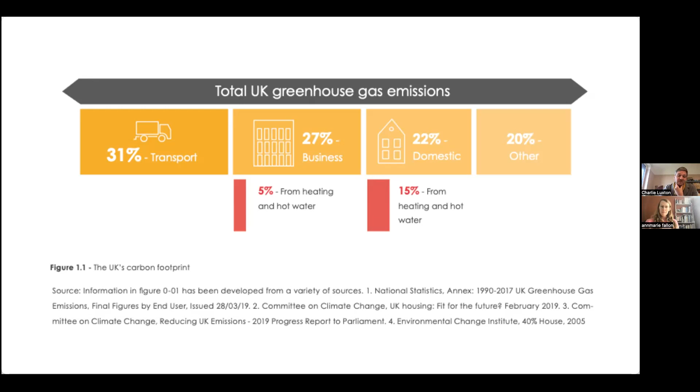Every week we're building something about the size of Paris, which is worrying. The building construction industry is the world's largest consumer of raw materials, and we know we've got to challenge something about that. So we get these wonderful organizations like LETI, which is fantastic, and we have these plans about moving towards zero carbon.

I love this diagram because it's ambitious, and I love it because it feels very friendly. But when you actually start driving into the reality of what you're trying to achieve, these figures are not little blue flags. They are systemic shifts to the entire way in which we not only design, build, and deconstruct, but for new buildings, it's also the way we then heat, and look at all the existing building stock. So it is a systemic change, although this diagram makes it look very pleasant.

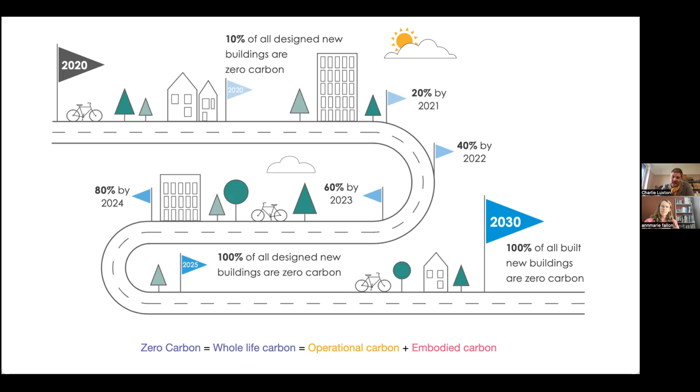A big part of the issue is to actually start thinking in a more circular way, and thinking really about the waste, because we're actually starting to tackle operational energy quite well. But the issue is, as you make a building higher performance, the embodied energy becomes a significantly larger chunk of the overall carbon emissions from that building, because we're focusing much more on whole life carbon—that's operational and embodied carbon.

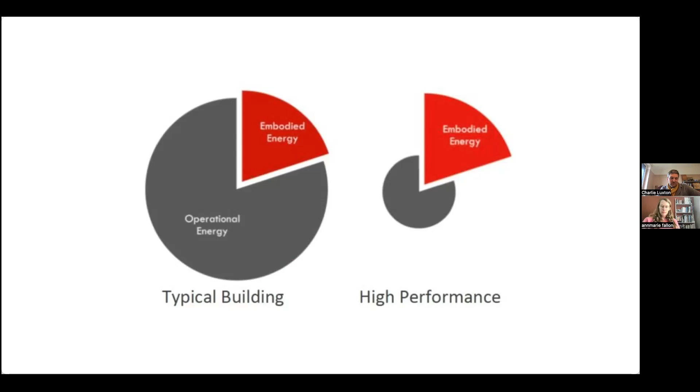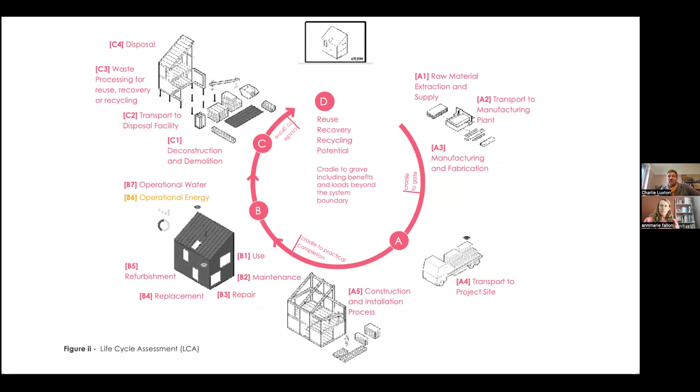I think it's fairly self-explanatory: operational is the stuff used during the building, and embodied is the stuff used to build the building. Critically, embodied carbon covers right from manufacture, transport, erection, use, refurbishment, maintenance, deconstruction, and then disposal. So it is, as they say, the entire piece.

This is a really useful diagram, again from LETI, which helps you understand where the carbon associated with buildings comes from. So when you hear that 49% annual carbon emissions for the UK are attributable to buildings, that is the full cycle—in-use actions within the buildings, and also construction and end of life. This really shows the challenges that we as designers, architects, and engineers are going to face.

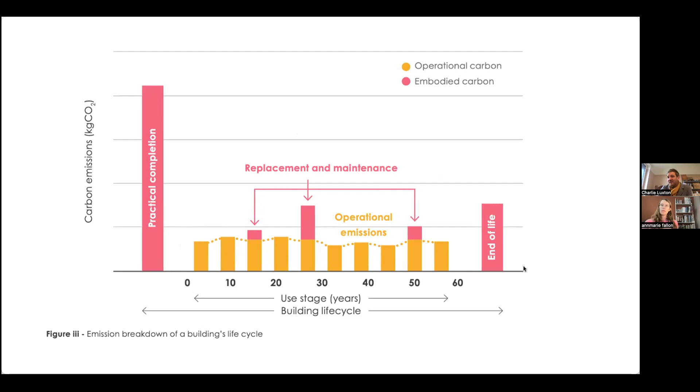The massive one is the embodied energy during construction. We know what we can do more and more about operational emissions, but there's still the replacement and maintenance cycle, and then obviously what we do with all the materials at the end. So really we need to start thinking in a much more circular way, and think about the full life cycle of our buildings when we're starting to design them.

There are a number of things I have tried to keep in mind when we are working. Thing one is that the most sustainable building is the one that exists. There's an American Institute of Architecture report that says it takes around 50 years for a building that is more than 30% efficient than average to overcome the impacts of constructing it.

We've only got a certain carbon budget left on the planet, and if we start knocking down old buildings to make them more sustainable, we don't have 50 years to make that back. So we cannot be knocking them down. It's quite interesting that architects declare this clearly - from a conference a couple of years ago, it's very clear that really the most sustainable building is the one you already have built. No matter what metrics you run, that seems to be the main message.

So the first thing we need to look at is systemically and intelligently refurbishing the existing building stock. That's a clear target, but what does it really mean? Actually it's a clear target not just abstractly but in real terms - there's been a seminal planning decision recently where developers tried to knock down the large M&S building on Oxford Street, and that was rejected because of the embodied energy in the existing structure. So planning is starting to catch up with this issue, probably quicker than most building owners.

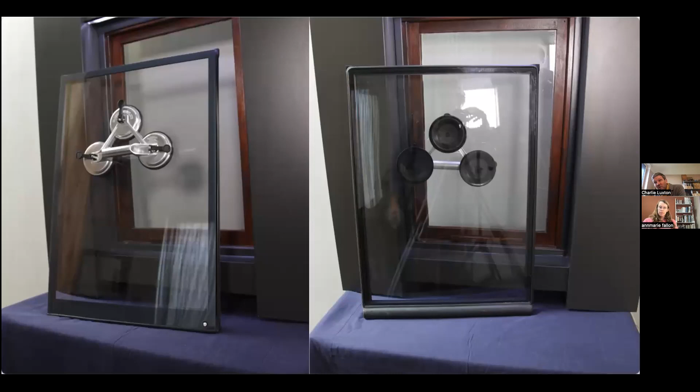So it's about intelligent, smart reuse, and this is something we've been trying to work on here - we're working on a window solution. At the moment with all these secondary, poor quality double glazed units and single glazed units, we're taking them out and throwing them in the bin. A few years ago I looked at this problem with my brother and said, this is ridiculous - these single glazed windows, well restored and maintained, can last 50 years. Why aren't we looking at how we can make secondary double glazing that goes inside existing windows? Because we know windows are probably the most carbon intensive part of any building.

What's really interesting is when you go to Finland, they've had triple glazing for years, but with a single glazed outer unit and a double glazed inner unit, and you can open the two to get into the section. The reason they do that is to protect the second double glazed unit from thermal shock - if you have an incredibly cold outer and a very warm inner, you get lots of shifting through the glass, which causes the units to break down quicker. If you keep an existing single glazed or poor performing double glazed unit and put a new double glazed unit inside, you get really good longevity for the second unit and much reduced carbon emissions.

So this is a removable, pneumatically activated secondary double glazing unit, which can go inside listed frames without planning permission because it's not mechanically fixed. It has a seal that blows up around the outside. These are the kind of ideas we need, where we're not throwing out things, but thinking about how we can upgrade and retrofit.

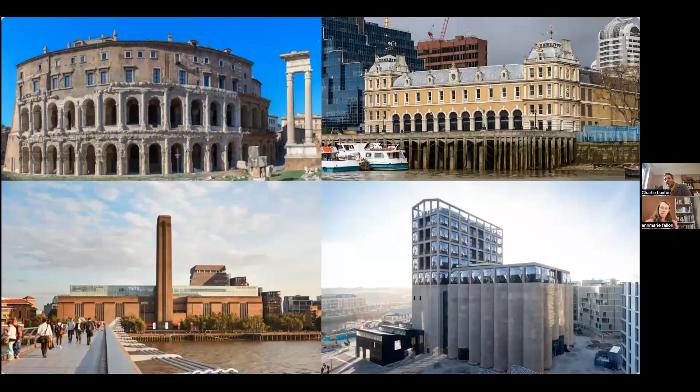Thing 3 is to design for a long life and flexibility. We can't knock things down, and we really shouldn't be tearing them all apart. So we need to think long-term and intelligently about how buildings can last for a long time. Here are some great examples of buildings that have been adapted really intelligently. I think this idea of adaptation, and understanding your building will have a very long life, is absolutely critical to the thinking. For example, I'll talk about a little office project we did, where we imagined what the building would become after it was no longer an office and became a house - how can we put things in now to reduce damage and alteration at a later date?

Thing 4: build for disassembly. This is an extraordinary building - this is in Brummen.

It's an extension to their town hall. They realized that because of the way the political boundaries were going to change, they probably only needed a town hall extension for the next 20 years. And that became the driving mantra for the design of the building.

So they designed it so that it could all come apart and be reused. They used many reusable modules, common sizes of things, so that they could go on. The contractor actually guaranteed 20% of the residual value at the end of the building's life because of how it was constructed. They reduced the amount of concrete and made sure everything could come apart.

So if you're going to do that, you need to remember where you put your stuff. This is a simple one about materials passports, which is starting now—the first one was done on that previous project, where they listed and categorized where all the materials were, what they were, and where they've gone. That's a really interesting challenge, but clearly something we need to tackle.

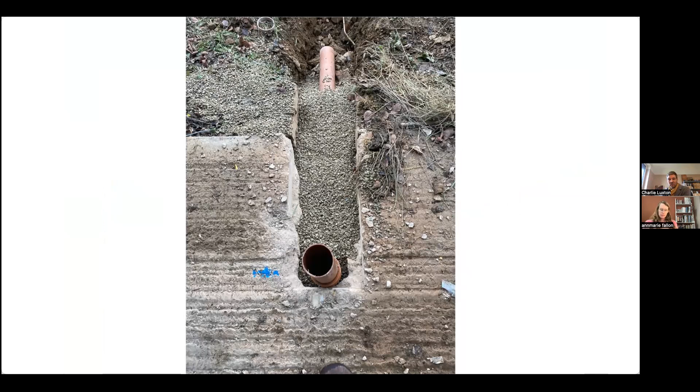We then adapted and strengthened the steel frame to take a new corrugated iron and PV roof, and designed the building to sit inside the existing building.

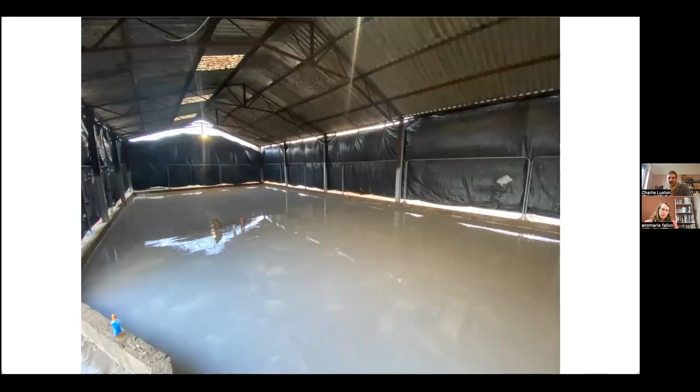So rather than smashing up the floor, we just put a very thin leveling screed down, so we were working on a flat area. The great thing is, because we were building under a roof, we were really protected from the weather and the elements during construction.

You can see what we used to screen the sides of the building was geotextile, which then became the base under the car park and the road when they went in. So it was used once and then repurposed for later in the building.

We then had a timber I-beam, Steico I-beam frame, pre-engineered, pre-cut, pre-labeled and delivered to site, which meant that we massively reduced waste because they could do nesting of all the cutting in the factory. So there was really minimal waste, and we did very careful ordering around the amounts of insulation—in fact, we had just one bale of insulation left at the end of the whole construction.

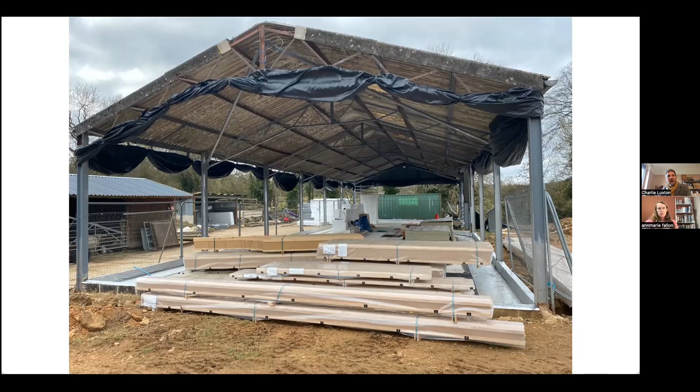You can also see that we reused the concrete blocks from those walls to make a sort of tray, which we then put a radon membrane all inside. I don't know if this is going to work—I'm hoping it will because it's a nice film, but I don't know how you make it.

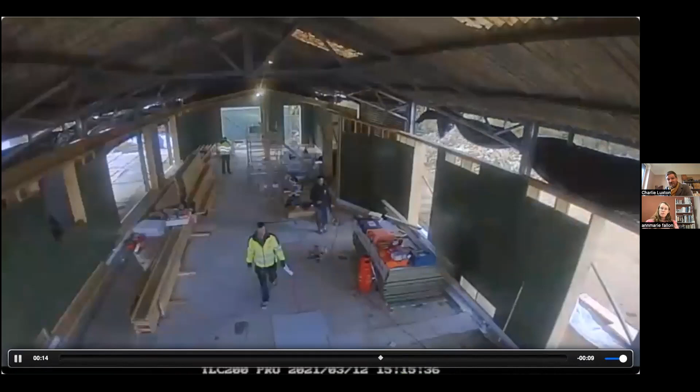Oh, there we go. So we then built this timber I-beam frame all onto insulation. We purposefully spread the foundations quite wide with very high compression insulation under the walls, so that it spread the load down onto the concrete slab, and we didn't have to reinforce it in any way. As you can see, the building is completely constructed inside the existing frame, and this erection went up over 6 days.

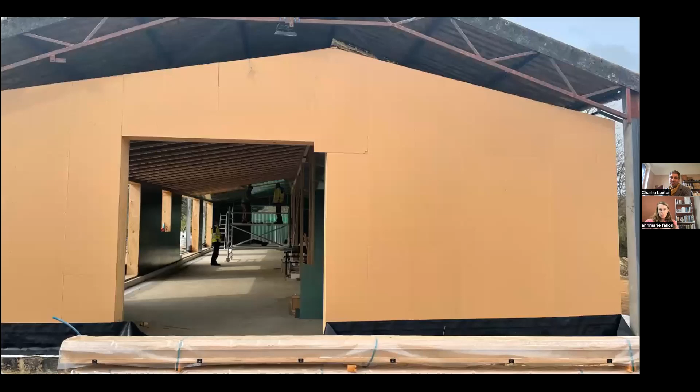And we then boarded it out with a highly breathable external and internal, and blew it with fiber. The great thing is, because we had a really accurate 3D model, we could be really clear about all our wastage. We had hardly any wastage at the end of the project.

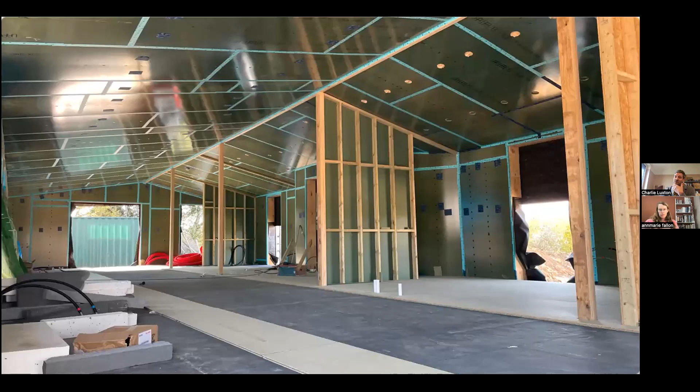And we made the building as simple inside as we possibly could, so that we could move walls at a later date. There's only 5 columns.

And crucially, we laid the floor insulation, 2 layers of insulation, and again designed that so it was laid with as few cuts as possible. So when we come to lift the floor, we can reuse those insulation pieces.

The floor was a Caberdek floor with a UK-made elm floor that we specifically found a UK supplier and manufacturer for. And then you can see, building inside a building, waterproof and airtight.

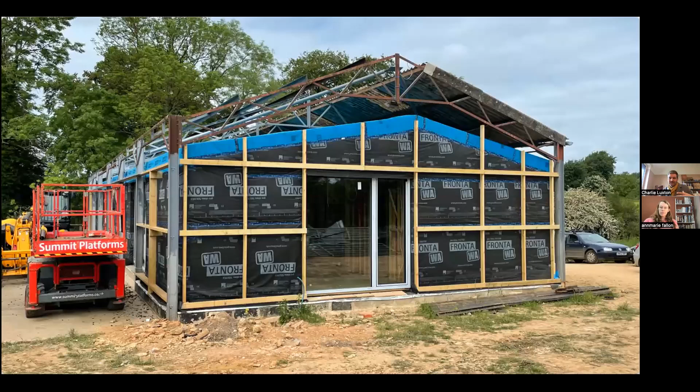We then could take the skin off the building and paint it and redo it. Airtightness, we got to 0.3, so twice as good as passive requirements.

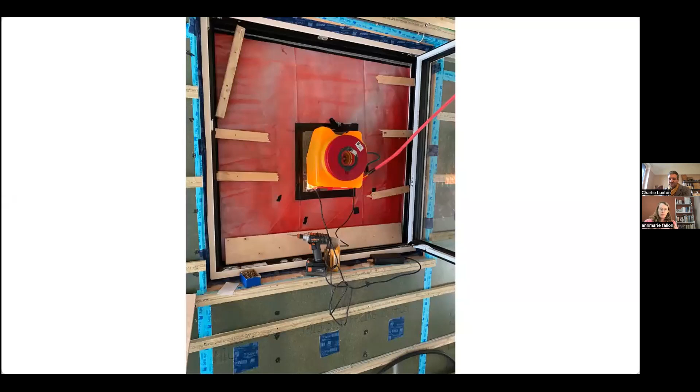And then you can see the frame and the PV going on. So this is the problem with a lot of Part Q, Class Q, and these kinds of alterations - people try and put the insulation on the outside of the building, and therefore the steels basically aren't designed for it. So you end up rebuilding the entire structure.

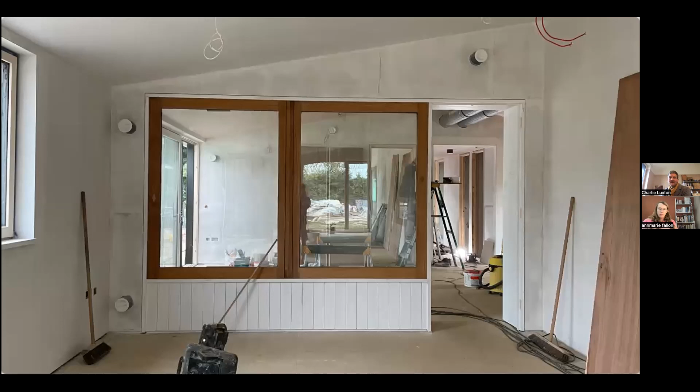We've used about 5 cubic meters of concrete in the construction of the whole building, so it's incredibly low carbon from that perspective. We then used glass - old windows that came off a job and were going to end up in a skip.

We stored them for a year and then used them, and all the wood on the underside is from the horse boxes that we planed down and reused. The walls are Thermocell, so that's about 40% recycled on site, I think.

You can see the brilliant creative use of provision for hand wash facilities, and we used all the steel off the building to create a temporary store rather than getting a lockable Portakabin shifted on and off the site. I'd rather pay labor than materials.

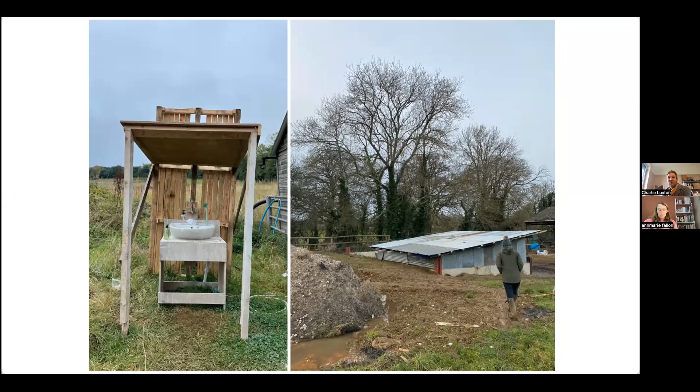So we built a little shed using all the raw materials during construction. There you can see the building. This is the lovely elm floor that was made in the UK by a guy called Sutton Timber.

And you can see, it's heated by an air source heat pump and through the MVHR system. And it is just off passive - it's 17 kilowatt hours per meter squared per annum.

We sort of realized that going to the next step to get to passive was such a significant input of labor that we decided this was probably fine.

And that's UK grown timber and all native planting. It sits in 3 acres where we're doing regenerative work - it's all wild, rewilding, and trying to bring back soil health from where it's been damaged by the horses.

And you can just see the solar shade there over the back window, which is reused industrial walkways. So it's kind of very - and actually you can see the concrete step.

There were some concrete retaining elements that we sliced up and used to make the step. And the concrete slab you can see in front of you, we've now cut up and cut flower beds into the floor slab there.

So again, just trying to be really sensitive, use as much of the - work with the building, I think is the key thing. You have to listen to the building in order to really drive down the carbon.

We're trying to do the carbon analysis on that. We didn't do analysis prior to construction, but we will do that eventually. At the moment we're running through all of the orders and dockets that came to site to actually analyze the as-built carbon rather than using a OneClick LCA model.

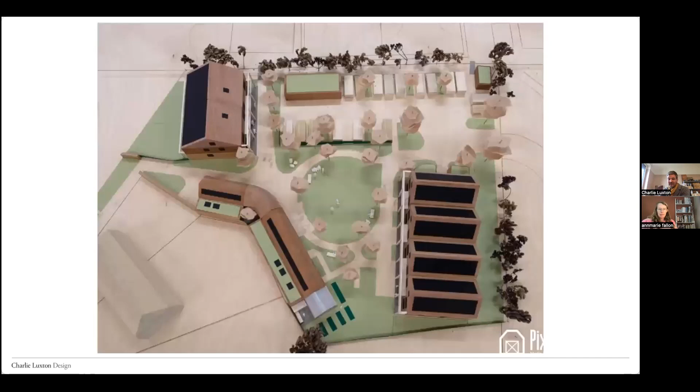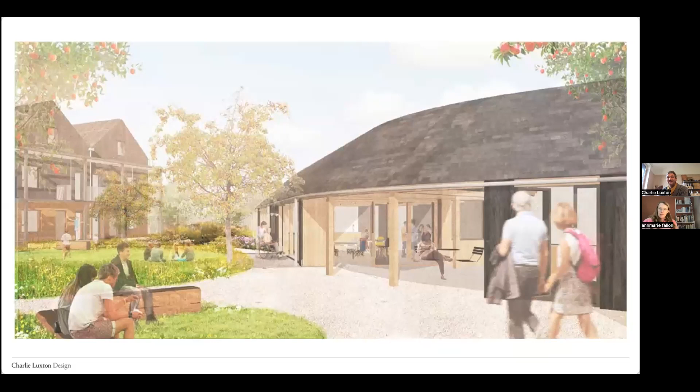I'm just going to run through another way that we've looked at the carbon journey. This is in our village where we are now. We're building an affordable Passivhaus community-led housing project, CLT, two housing blocks and a community building. That's the north block, this is the south block, and this is the community building, which has actually slightly changed. We started this about 4 years ago, and we're hoping to start on site in about a week. We signed the contract, and we finalize the JCT on Monday.

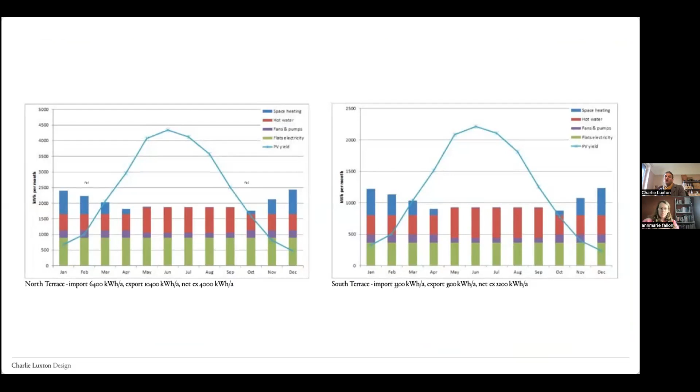So the buildings themselves will be passive and energy positive, exporting about 5,500 kilowatt hours per year. Just quickly, to drop back onto this building, the office exported 2.5 megawatts last year, including charging about 8,000 kilowatt hours into cars. So it's carbon positive, it's energy positive as well. So understanding that it was energy positive in use, tick, for the kind of life cycle carbon thing.

Then it was like, okay, where are we with the embodied carbon? So what we did is we ran a number of scenarios to analyze this. The first one was literally, if you built this using standard materials, what is the carbon? We then said, okay, let's try using local materials - what does that do to carbon? And then let's go to a third scenario where we're using as much recycled material as we can, as much local and reclaimed materials, and slightly changing some specifications.

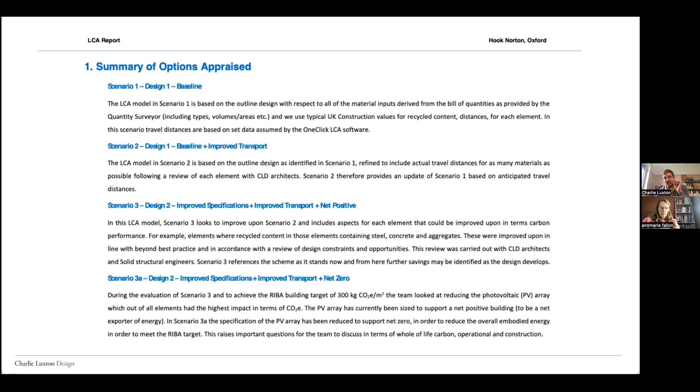So for example, when we were doing the modeling, the sanitary ware was coming up really high, and we dived into that and realized steel baths have an enormous carbon footprint compared to an acrylic bath. Now you would think a steel bath's going to last longer, but unless it's secondhand, no, it's much worse than acrylic. So we really dived in without changing the design, but specifying as close as we could from a cost perspective, but also from a carbon perspective.

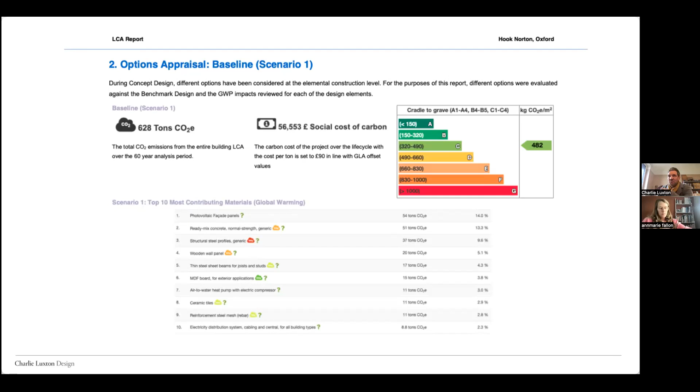So where we started is a C rating, that's 480 kilograms of CO2 emission per meter squared, and that's a total of about 628 tons. So that's doing no recycled and just standard delivery.

And this is quite interesting - this shows you where that energy went. The big one you'll see straight away is the energy production systems, basically the PV. PVs have a lot of embodied energy, but obviously they produce a lot. Increasingly the thought process around PV is unless you can replace an existing roof or roof material with a PV, because of the speed of decarbonisation of the grid, it might not be the best thing to do. Unfortunately, the government are trying to get PVs everywhere, but that's not always the best answer.

I think the subtlety to that carbon conversation around PV - and maybe this is interesting to hear from other people later - is my suspicion that if you're charging electric cars or batteries locally off the PV, it probably knocks down the embodied energy payback quite significantly because you don't have the losses over the grid. But that's the assumption I've made. It'd be really interesting to hear if anyone's got any thoughts on that.

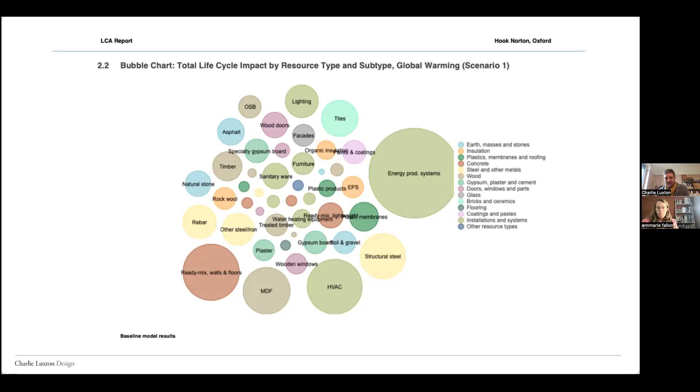So then we did scenario 2, where we just looked at transport improvement. We only got down to 622 tons - we only took about 6 or 7 tons out by thinking more about transport. Just to be clear, this is already a fairly good building because it's engineered glulams and wood fiber and all that. So it was a good building to begin with.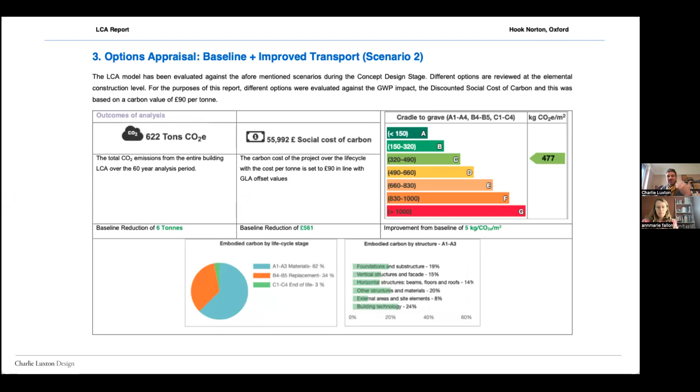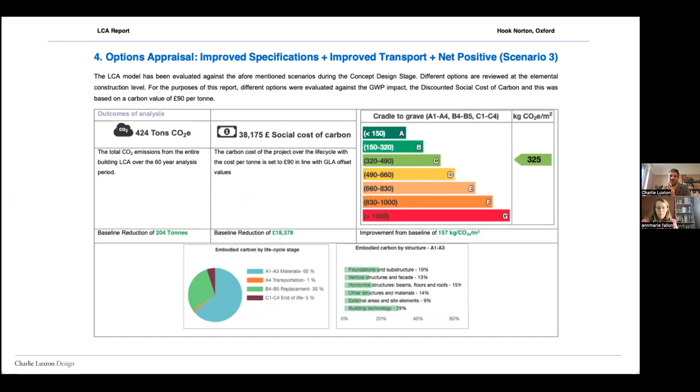We then got to, this is still with the PV, down to 424 tons, the top end of a C, by looking at reclaimed slates, local material provision, reclaimed steels on the balconies, and changing some specifications. But in order to really get towards the RIBA 2030 guide, there was quite a lot of foundation carbon costs, because of the ground and desiccation to do with some trees. If you take out the PV, we could get to a B, but then it's not energy positive. So really, this is just about getting to the 2030 guide of below 300 kilograms per meter squared.

And that was really hard. And this is a rural site, yes, with some quite expensive foundations, yes, two buildings. But don't be under any illusion.

Meeting those 2030 targets is going to be one hell of a challenge. And I don't know where this office is. I suspect it's sub 200 kilograms per, probably quite a bit below that. I need to get that certified.

But I suppose if there's one thing that comes out of this, it's that you really need to start engaging in carbon modeling early. There's so much to be learned, and it really isn't that straightforward. It's going to massively change the way in which you design. One of the key things to think about is how we can tap into circular economy thinking to try and drive down the embodied energy, upstream embodied energy prior to coming to site.

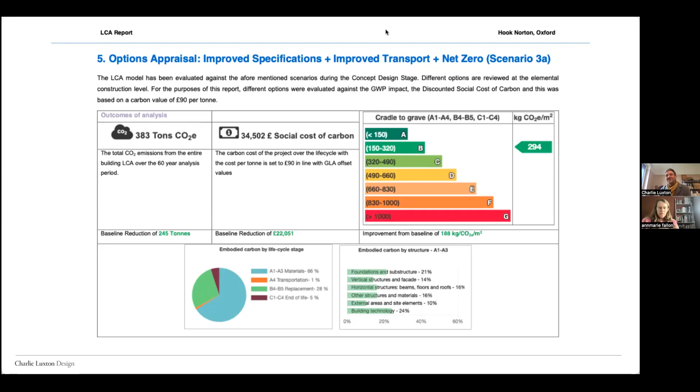I'm going to stop now. I could carry on, but I think Anne-Marie is probably much more sensible and accurate about stuff. Thank you very much. Cheers, Charlie. Oh, absolutely. That was amazing.

A really, really amazing example to look through. And I think hopefully we're top and tailing the two presentations, because I'm going to pick up on many of Charlie's themes as well, and the interpretation of the challenges that we've had with very similar issues at a different scale to do with the circular economy, and how, practically at scale on big complex projects with complex supply chains, that challenge becomes even more of a challenge. So let me share my screen and we can get going.

And I share your view as well, Charlie, about the embodied carbon of PVs. It's a really uncomfortable thing. People are very uncomfortable discussing that, but you can't get away from the fact that even the particular components that go into creating PV panels are targeting particular habitats across the world, that there's exploitation of land use from the creation of them, like lithium batteries, the same kind of concept. So we kind of solve one thing, but we leave the problem of what we do with them on the other side.

Architype, we're around about 40 years now. We've been a sustainability practice for most of that time, very community led, community builds led practice, kind of the Walter Segal method coming out of the 70s and 80s in particular. And probably we're looked at as kind of hippie, hairy architects by the architecture profession until maybe 10, 15 years ago, when we really started to focus in on this performance-based design around natural materials, but also the performance gap that Charlie's mentioned in operational energy terms.

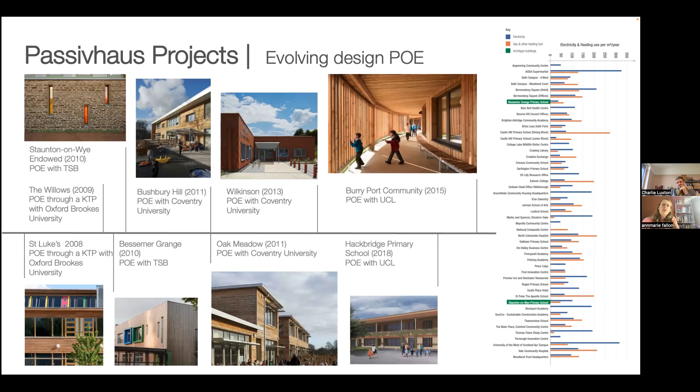So I'm going to focus the process today mostly on new build, but we also touch on retrofit and the whole life carbon aspects of that as well. Another particular thing to note is that these buildings we can design, deliver and operate, but unless we actually understand how people use them and the behavior of energy use in those buildings, how those buildings might protect or buffer the occupant from those behavioral patterns as best they can, is something we're always trying to do. So whether that's on our own projects or others, as part of a consultancy basis, we're constantly learning. As Charlie said, I don't think there's one person who knows everything about whole life carbon and embodied carbon, because there are so many discoveries happening on so many different levels just about how we understand and interpret information.

So I suppose the bigger concept, without just looking at operation or focusing on embodied, is that idea about regenerative design, trying to account for everything. And I suppose that was the theme of the hour. How do we account for everything? Are we accounting for everything? Probably between what we are presenting today, we're still not accounting for so many things, but we're trying to make a really good attempt.

And we have huge challenges to that, you know, never mind.

I totally agree, we definitely have a performance gap in embodied carbon and whole life carbon terms. There's a huge misleading going on out there in terms of policy within government, an ignorance to the whole life carbon question, because we've now focused on the trendy phrase net zero, which just refers to glorified decarbonisation of the grid and nothing really to do with demand reduction. So we have that disconnect.

And we have disconnects between life cycle costs and life cycle carbon. So as designers, we're starting to get a bit more literate in terms of life cycle, whole life carbon concepts and applying them to our buildings. But actually in terms of life cycle costs, the QS or estimating side of things, and also clients don't really fully understand or are literate enough in their own management of their assets to understand how life cycle costs can have an overall benefit if we look at life cycle carbon in the right way.

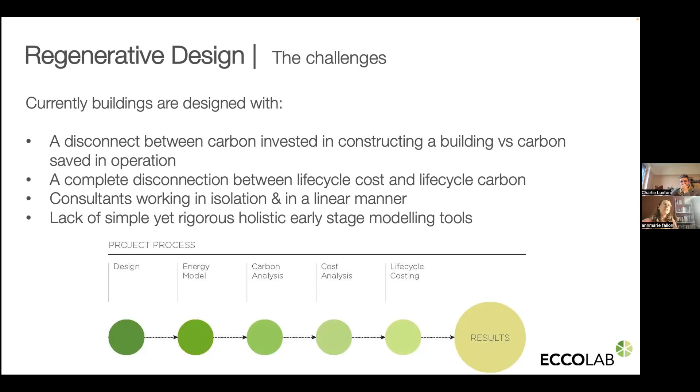We also have a terrible reputation as an industry of working in a siloed approach to our designs, and a very linear approach where the architect gets the design done, then the engineer comes along and puts some services in, and then the structural engineer, six weeks after the architect has decided what their plan is, decides he'll put the structure in. It's very divorced and dislocated when it needs to be an integrated approach. And the other weakness is the ambiguity around the different modeling tools and where that modeling tools information comes from.

I know we're all very aware of SAP and its weaknesses and strengths and limitations, and other modeling software, but I think we're going to find the same in terms of whole life carbon tools. We'll have this idea that there's different tools being developed for different consultants.

And I see it all the time now, a structural engineer presenting a whole life carbon model to a client without the whole finishes involved, without understanding the operational energy of that building, or the cost consultant looking at life cycle costs from the standard RICS information without really tailoring it in a bespoke way to the architect's design. In theory, we could have all these models come together in a really integrated way and develop a really powerful, accurate design model that tries to really predict what's going to happen in terms of whole life carbon results.

And the other thing to quickly mention is, as Charlie's example has beautifully shown, you can make really early decisions that can ultimately affect cost and value. But as we try and move through a project and make those decisions later and later, we're creating more cost, more risk, more pricing risk for the contractor, especially in a D&B situation, and they ultimately become less effective. So that last 5% that costs nothing to decide in RIBA stage 1 or the feasibility phase suddenly costs something significant at the end, and then gets left out of the project, and that's a real pity.

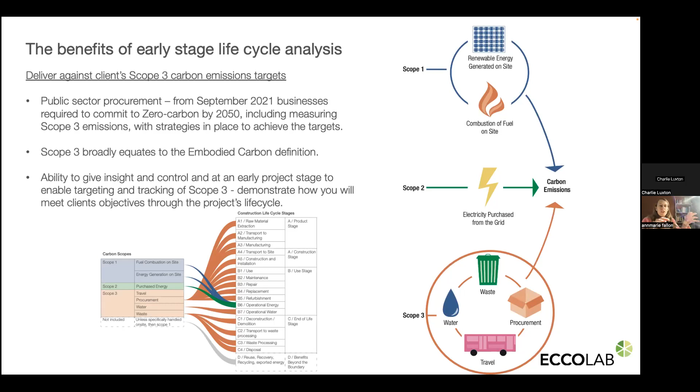And of course, stage D - again the industry is not quite set up, but we have some amazing examples. Heriot-Watt University have developed a product called K-Briq. Two very innovative people there, which is 90% recycled inert materials from a building site - it can actually be the site you're about to build on. That idea of bringing a circular economy focus to the construction industry is happening in these lovely little initiative ways, but in terms of something at scale, we're really not there.

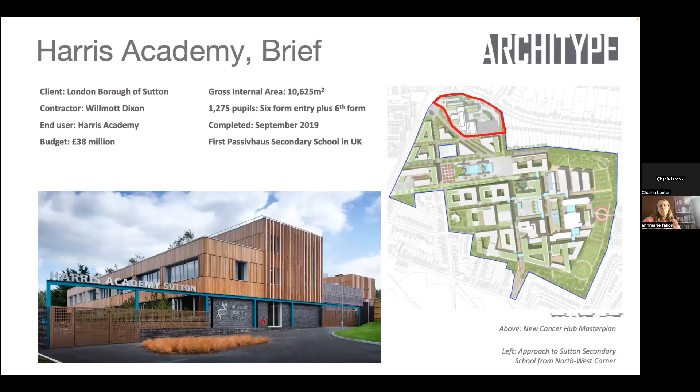We had a very complex site, so the form wasn't as simple. We talk in Passivhaus about trying to keep forms very elemental and simple, and there was that lovely simplicity in Charlie's barn. This site had very lawyered up neighbours, and the sloped nature of the site had its limitations. We had a very clear brief that there was a requirement for low carbon from a whole life perspective, as well as Passivhaus, and from the get-go there were material choices we had to make that compromised that somewhat because of the site constraints.

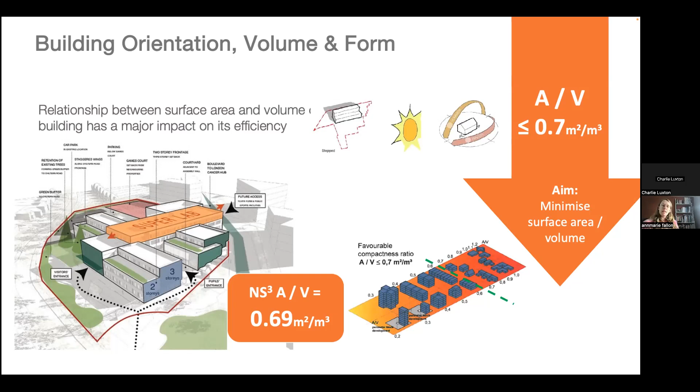However, we still managed to create quite an efficient form ratio to minimize overall heat loss where we could. But you can see this kind of stepping back - there's wings, it's like a winged block that on another site, with another brief, we would have tried to rationalize more and create more simplicity for. And that's just some examples of the sections and elevations.

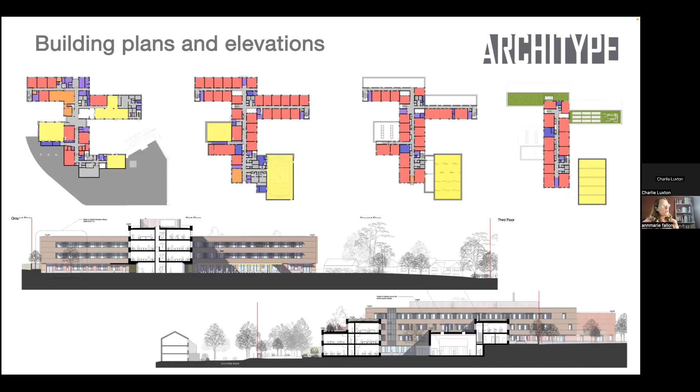A typical Department of Education driven scheme with classrooms and corridors. We're doing a lot of education projects now in Scotland where there's a very open pedagogy and openness about how we can consolidate multi-use rooms and multi-use learning spaces that ultimately help buildings become more multifunctional and consolidated as sustainable assets in the future, rather than always being consigned as just a school building forever - it could actually be something else, baked in from the beginning.

Because of the sloped nature of the site, the building had been robustly tested early on with different construction appraisals using our in-house carbon tool, ECCOLAB, where we were able to look at the cost, energy and embodied carbon or whole life impacts of whether we went with CLT, concrete or a hybrid option.

So even though unfortunately we had to have a lot more concrete in the building than we would like at the time - and maybe there are more innovative design decisions you'd make now rather than 7 years ago - we looked at having 50% GGBS cement replacement, which takes a bit longer to cure and has an impact on site and program, so the contractor has to be on board with that.

We went with mass CLT, which has a higher embodied carbon content than a lightweight timber frame, for example. But in the insurance industry, on large scale buildings now, CLT seems to be the only safe option we can go with in terms of compliance for fire, while we wait for the timber frame industry to catch up with their certificates, etc. And then we've had an element of hybrid steel columns in there as well for the spanning of the hall in particular.

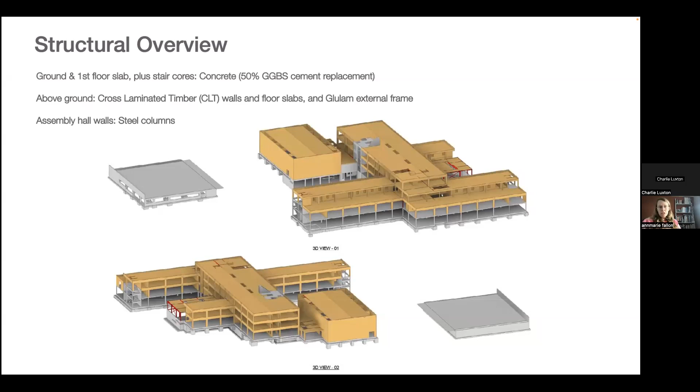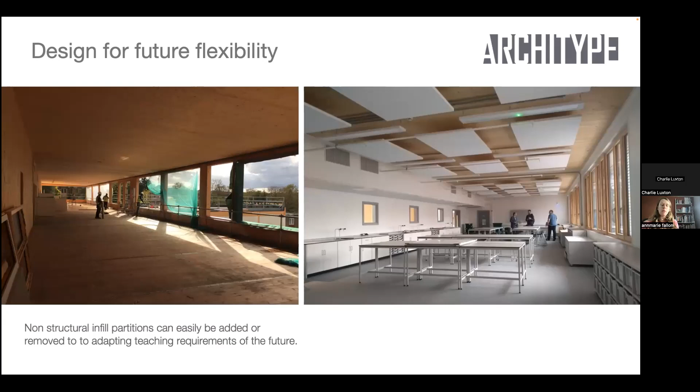So a wide range of different spaces were created. Even within the limited typology of the building, which was very much a school, we tried to create a sense of future flexibility to allow for different pedagogical learning or adaptation of different education needs in the future. An example was utilising the span benefit of CLT, allowing flexibility for class sizes or study group sizes as we went forward. And there's a minimal material palette, which I'll come back to in the next few slides.

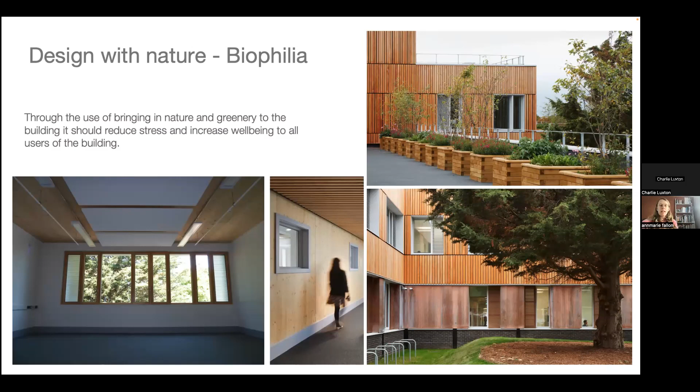I'm sure every architect is passionate about working with the landscape and biophilic design. We tried to embrace that as part of the design process by retaining as much of the landscape as possible around the site, with temporary protection ensuring existing mature landscaping was protected as best we could, while also adding other landscape features. There are visuals prioritizing certain views to the outside, given the well-established link between nature and well-being.

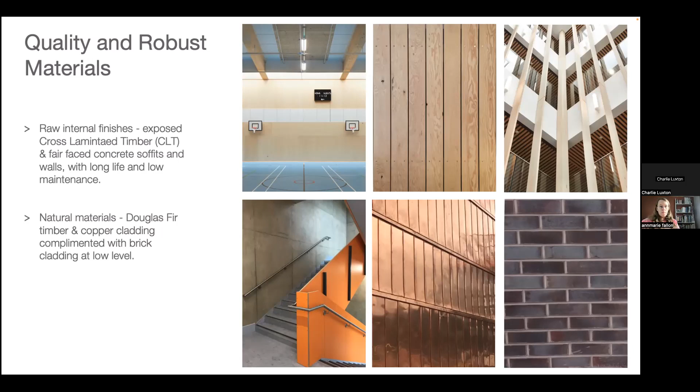While some products are quite high embodied carbon, which we've accounted for, we've tried to keep a lot of the finishes as raw as possible, instead of layering partitions or other finishes on top of materials. As you know, the challenge with CLT is that everyone wants to close it up, especially in non-domestic buildings, which defeats the purpose of having the CLT. We were able to expose a lot of the surface finishes and keep them as unfinished or raw as possible where we could.

This project also had a brief around designing for the circular economy — that's stage D, design for deconstruction. There were interesting learnings from this. We had the CLT, which inherently could be reassembled and used elsewhere at any point over its life, and the steel frame can be modified and reused in a different context.

However, bringing together that CLT involved a lot of deep, long screw detailing, so when you take those panels apart in the future, it's still possible, but where the screws have been, the structural integrity would be compromised. So there'll be an element of having to accommodate some waste percentage on those panels in future, in terms of the reality of reusing them again.

We put these aspirations in briefs and try to design with the right materials, but ultimately when it comes to fixing those materials and getting specialist subcontractors on board, we can sometimes lose the purity of that deconstruction or disassembly concept. We can set aspirational requirements at stage 3, through planning, or toward tender, but when it gets to design and contractor responsibility for fixings, we're still a little behind — the industry hasn't really embraced other forms of fixings that might allow the full panel to be used.

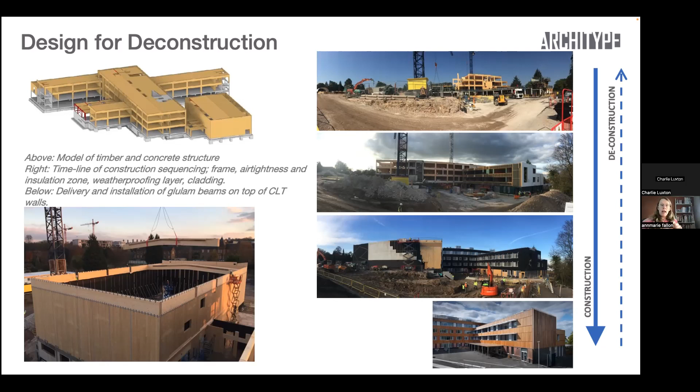The majority of the CLT can be reused, but there will be a percentage of waste where fixings across bigger spans have had to penetrate those layers to the effect that they won't be reusable, unless made a little smaller. Understanding the material you're working with and bringing that lesson forward means we're now looking at smaller panels, or a system to support a series of smaller panels, so they can just pop out and be reused rather than the fixings becoming a limitation. We need fixings, but there's a lot to think about involving the supply chain at a later stage that we need to be mindful of as designers.

So the Resolve framework — we tried to benchmark the project against that as best we could, and we're quite honest with ourselves: we didn't hit all the targets with this building. We weren't able to fully optimize and keep circularity on all materials, for example, but we made a really good effort at trying to hang on to those principles and defend them through the construction process.

We brought in an element of other regenerative design elements in terms of specific promises by the supply chain. Now, I'm skeptical when someone says they plant 3 trees for everyone cut down—tree planting is only one part of the solution—but there was an attempt to seek out the best intents and best endeavours from quite a large supply chain.

Interestingly, recycled newspaper cellulose we were able to use in the Larsen truss across the whole building envelope. We're still doing that on buildings under 18 metres, with a lot of technical submission and support to building warrant and insurers, because it is possible to create a fire safe timber frame construction, which insurers don't quite believe, unfortunately, but we are able to prove that. So it's been great that we've hung on to some of those more natural insulation materials on this project.

The wings themselves and the orientations have been responded to, whether south, east or west. There's quite a lot of glazing on the building because of the daylighting requirement for education, which we've been able to counterbalance a little with shading strategies.

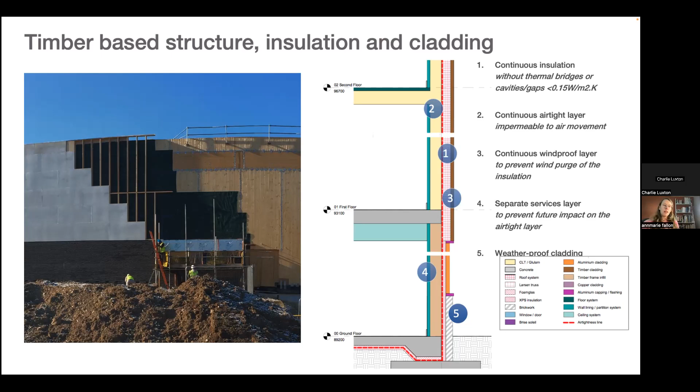So there's been lots of analysis on the kind of shading. And again, some of the shading timber is actually designed to be reusable, but also just protecting and matching the daylighting requirements with the education requirements on the building, because ideally we would have glazed the building a little bit less.

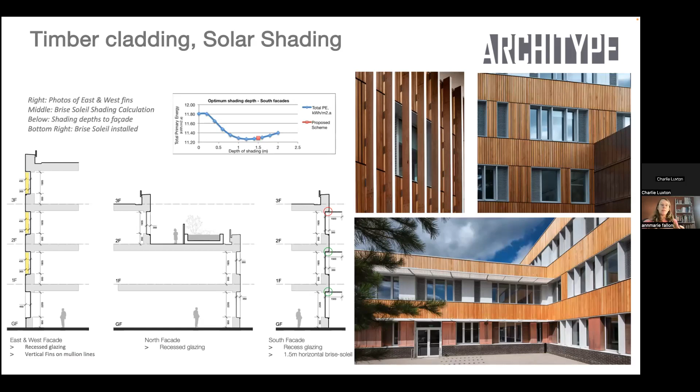Again, as Charlie said, the highest carbon intensity part of new construction, as well as existing, is glass and glazing. And we're running out of sand globally in the world—silicate and sand being really important constituents of glass. We need to be really precious with that.

But again, designing a building that has a reuse potential and a kind of flexibility within its educational typology, hopefully ensuring this building's longevity, as well as the wider master plan for the cancer hub in Sutton and London, which has a really strong sustainability and reuse focus.

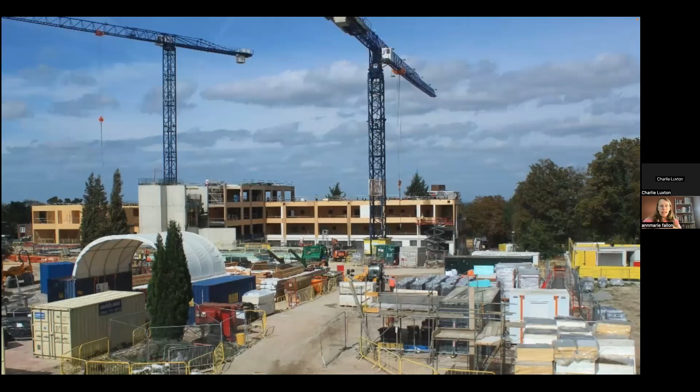So this is just an example or two from the site. Again, the assembly, the labour time, the amount of energy being used on site whilst a building like this is being completed is much more reduced compared to a wet trade approach to construction. So there's lots of positive benefits there.

Of course, doing whole life carbon and having standard values for that means that, like Charlie, as part of some of the research we're starting to look at, is a similar way—how can we quantify that to show the benefit of this, to show the value maybe of going with CLT over another construction method, even though steel frame assembly is also quite quick, and understanding those metrics of what site costs and site energy use are.

The strategy for air testing big buildings like this can be quite significant, especially on the contractor's part. Willmott Dixon was the contractor on this building. What we did was advance various elements of the supply chain to come and create a sample room where all the training happened, and we did some initial testing in that room.

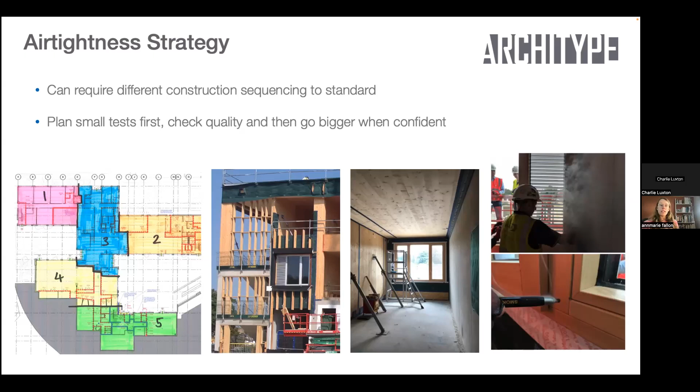This was to ensure that the robustness from an operational energy point of view can be achieved. One fan did the air testing for that building - 10,500 meters squared - and we got an air tightness of about 0.3 or 0.31 air changes. It was the contractor's first time, and I think it might have been the tester's first time doing a Passivhaus test on a building, not just the building regs one. We were really happy, but also not too surprised, because CLT inherently is an airtight system, and we were able to achieve that quite easily.

Another example of embodied carbon of services: TM65 has come out over the last year, and we're all trying to get our heads around what that means and how we even account for embodied carbon in services. But I think another particular way we can address that with Passivhaus is by avoiding radiant asymmetry in classrooms or spaces and ensuring surface temperatures are even.

We don't have to put radiators under windows, and we don't actually have to put MVHR or ventilation over windows either. So we can start shortening distribution runs in buildings to be on that inner wall where all our main core services run. It's not just architects trying to be efficient with design, it's working with M&E engineers to figure out how many kilometers of duct or pipe, or insulation impacts of those services, we can save in big buildings by being more efficient and trusting that the building envelope is performing.

So I think that's really important from an operational point of view. The heating system - this is pre-decarbonisation, but there is a future connection to district heating planned in for the building. We have two boilers heating this building, two 160 kilowatt boilers, one in use and the other in reserve, and it's at about a third of its capacity based on the monitoring.

We're dealing with some hot water on this heating system as well as some instantaneous hot water through the design, so it is picking up some of that. But the heat demand - if you see a colleague visiting, standing beside one of the 400 by 400 mil radiators in the room on an inner wall with a much shorter distribution route - is really impactful when you're standing in a 60 meter squared space. That is a full classroom he's in.

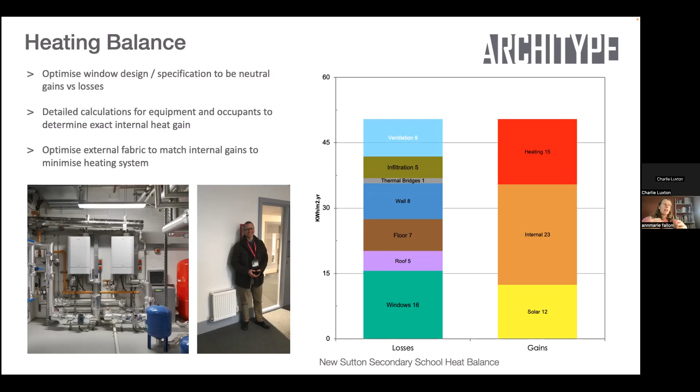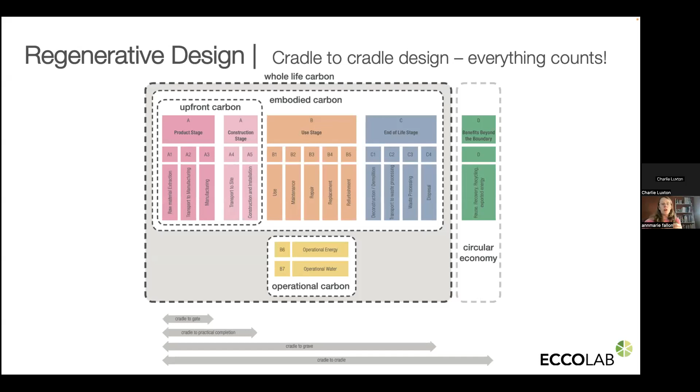Just briefly touching on the whole life carbon accounting from the project - we've touched on the different stages already: upfront carbon, embodied carbon, end of life which is the slightly controversial bit, and the bit we haven't really managed to grapple with fully as an industry, which is the other boundary benefits like reuse and disassembly. So coming back to operational energy, here's some benchmarking for schools in terms of energy use intensity consumption.

So we can see all the DEC percentiles, the LETI benchmark, the RIBA 2030 benchmark, and the partially occupied data we have from Harris Academy from 2020. We're just getting these graphs updated now to reflect 2022 data, which I think is sitting at around 40 now, not 32, because we have almost full occupancy now. Our design value of 51 energy use intensity in 2020 was 32, but COVID was there and it was phasing in students, so it wasn't a full classroom. So the design is performing with no performance gap.

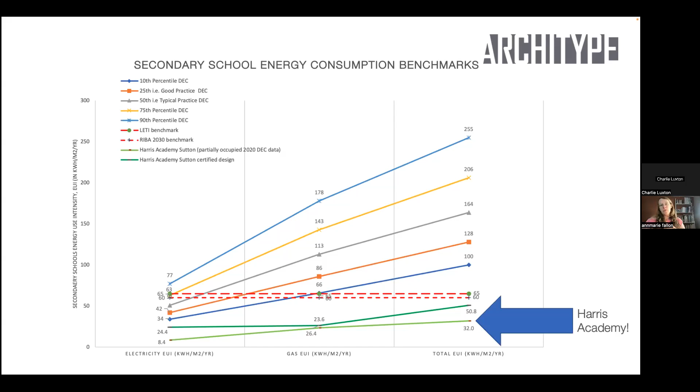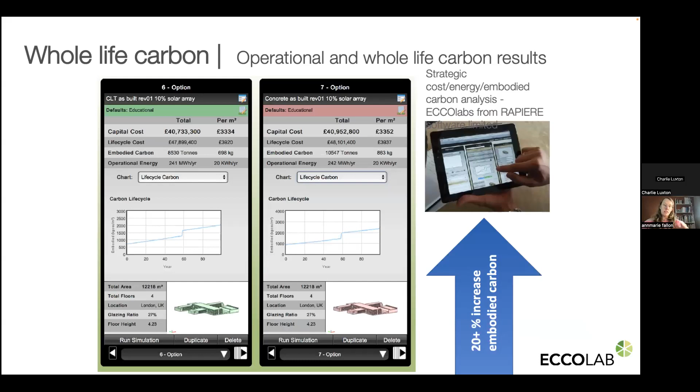In terms of the comparison between carbon of CLT and carbon of concrete, we had a 20% increase when we compared both options. We also blended both options, as you saw, from a concrete and CLT perspective, which would have led to a little bit less of a difference between the two, but still a significant increase on the carbon itself. We've included end of life here, but I'll come on to this in the next slide, just about the kind of clarity we need to be careful of around the end of life emissions.

Compared to a typical CIBSE benchmark school, we have an overall 55% reduction in whole life carbon terms of that building. We've used EPDs and standardized benchmarking for many of those results. At scale, it's not that it's not feasible - it's actually amazing practice to be able to do what Charlie's doing and pick out literally the delivery dockets, find out exactly where the material comes from, not just assume bricks all come from Austria, and find out the true nature of some of the carbon transport impacts on A4 and A5, travel and site works. They are big energy guzzlers, and currently the data of how much energy those two can be is so variable that the benchmarks alone aren't usually good enough to work that out.

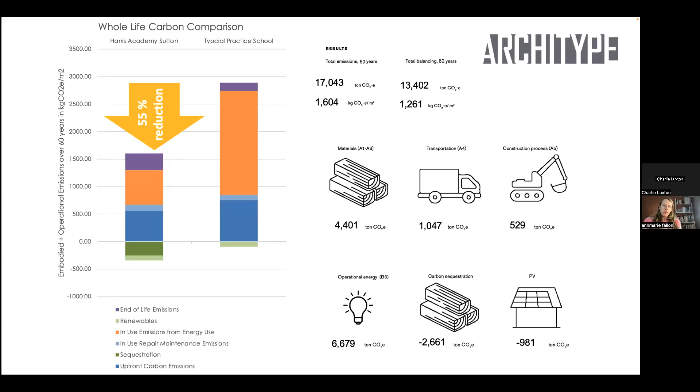So being very mindful of that, and also being very mindful of how we address or show biogenic storage or sequestration, as we will know it as well. I know RICS is bringing out some new data later this year - I'm not fully au fait with it, but I know currently the RICS methodology for accounting for whole life carbon excludes biogenic carbon in stages A1 to A5 of a building's stages, unless we can confidently include the impacts of stage C, the end of life stage, and the timber originates from sustainable sources, which we know can be highly suspicious depending on where it comes from in the supply chain.

LETI then says - so we have the RICS methodology, and then we have the LETI methodology saying that biogenic carbon over the life cycle of a building equates to zero, because the upfront emissions of timber are so much better than any other product, but it does release carbon when it's burnt or composted. That's unfortunately the default we have to go to with timber, because we really don't know what's going to happen with any material at the end of its life.

So when we make grand assumptions about what happens at end of life and we report including sequestration, it can be very misleading. We need to be very, very careful of that, because unless it's written into the covenant or deed of a property that legally the next owner in 60 years has to reuse that timber, or downcycle it but reuse it as a different material, we have no guarantee that it won't just end up being burnt or composted.

What we try to do - and these two pages just show what we're benchmarking across all of our projects, like many practices, if they haven't been done through the construction period already - is, if you just look at me flicking between these two graphs, including and excluding the biogenic storage to see how we comply with both the RIBA targets and the LETI standards here. I have to absolutely agree with Charlie here as well: it is a real challenge unless you start including biogenic storage to achieve those results. We just need to be very mindful of that.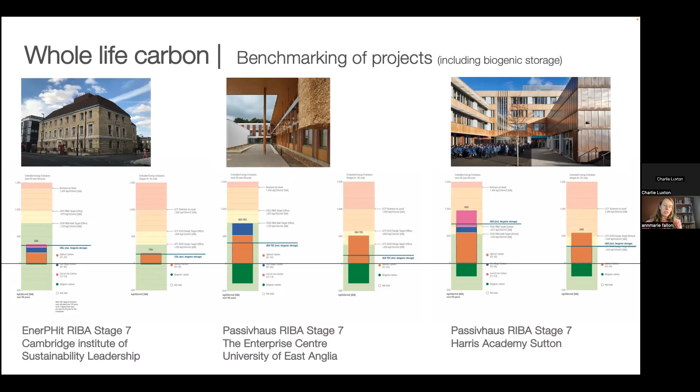Just to wrap up, I've only one or two more slides. Whilst it's kind of easy, in inverted commas, to get whole life carbon of new builds, you'll see that we have a retrofit there - the Cambridge Institute for Sustainability Leadership - which has a very, very low carbon impact.

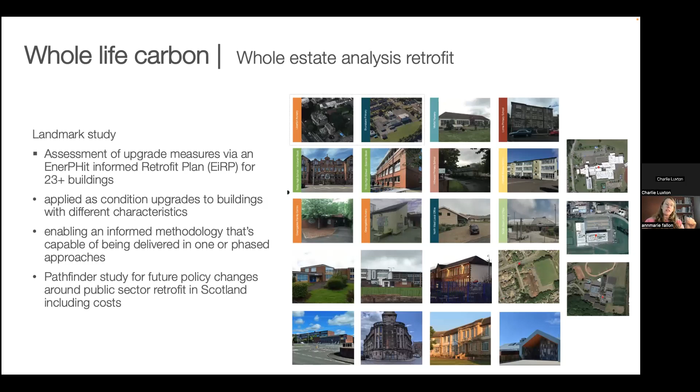We actually need to be looking at things on a much wider basis. So at the moment, we're doing a study across Scotland. There's about 30 buildings now, not just 23, where we're looking at a variety of different intervention measures to deal with operational energy, as well as decarbonization, about net zero estates, but also looking at the whole life carbon impacts.

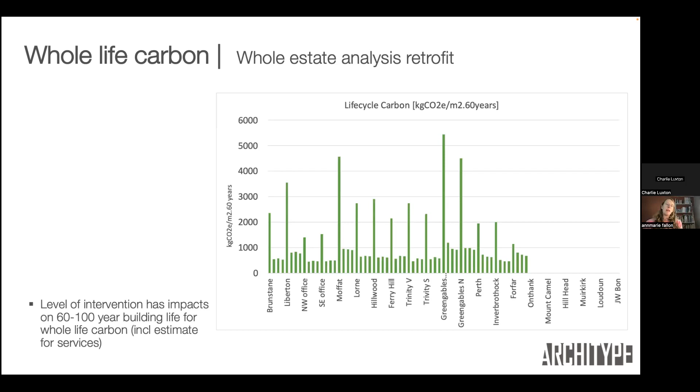On carbon outside of, including the embodied carbon that's being added to those buildings as part of the retrofit. And what's really compelling out of that, and this is kind of an anonymized intervention graph, is that any addition of embodied carbon of materials to a building, once we decarbonize the fuel source and reduce the energy demand of that building, has an insignificant overall whole life impact. So I know there's a bit of scaremongering out there about how much extra material do you need, and do we need to do that to existing buildings? But actually there's compelling evidence that the whole life carbon boundary can be treated really well and can respond really well to that deep retrofit approach.

And just to focus on this last slide, touching on what Charlie said, getting your tools right at the start, integrated with your design team in a collaborative way, trying to build as light as possible. We could have just built in concrete with Harris Academy and left it simple, but we tried to bring in and compromise for the fact we had to compensate for the concrete.

Early assessment, greater reduction potential, that's the same for operational energy on its own as well. And carbon hotspots - in Charlie's example, it was the floor and leaving that down there. We know a lot of embodied carbon can go into existing foundations, to rip those up and put in new ones, or building foundations in the first place, which are very carbon intensive. So how can we lighten that in terms of our impact on the carbon percentage there?

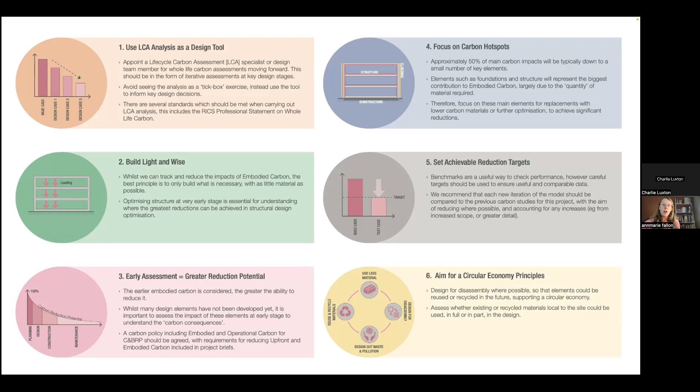Okay, that's me. Sorry, I rammed on a little bit, and I wasn't actually as succinct as Charlie. No, I wasn't very strict with my timekeeping there, but that was. I heard you, and I was like, oh, I better hurry.

That was absolutely fantastic, thank you. It's obviously been met very favourably from the comments in the chat. Yeah, it was inspiring and frightening at the same time, really. Especially going back to Charlie's work at the barn, I love the idea that it's part workplace and part manifesto. Whilst it only took 5-6 days to do the initial erection, I'm presuming there was quite a long time in the thinking there, but the minutiae you went through shows it's still hard. And if it's hard bearing in mind the work you've done, then when Anne-Marie goes on to talk about the bigger projects, it is scary how difficult this is going to be. But you've shown an enormous amount of information there and inspiration in terms of how it can be done. So thank you very much indeed.